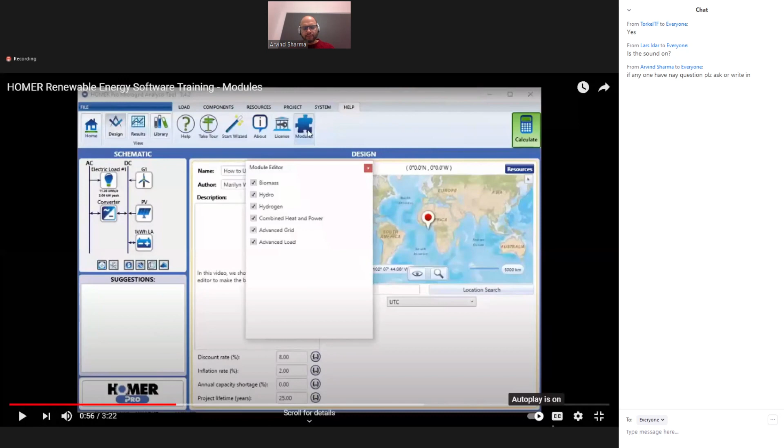I'm sorry to disturb you, Arvind. Before just going to the software, can you kindly please give some overview introduction about this Homer software? What type of analysis - overall, I'm asking what type of analysis can be performed using this Homer software.

Okay, Konada, I was playing this video - if voice is not available, can you hear it? This voice was available - were you able to listen to the voice of the software while this video was playing? No, there is some problem, maybe because my voice is on. Now it was available. No. Okay, don't know.

I thought this is something that you have covered yesterday, that you have shown how to download the software, but what are the features of this software. So anyway, I'm just explaining the few features of this software.

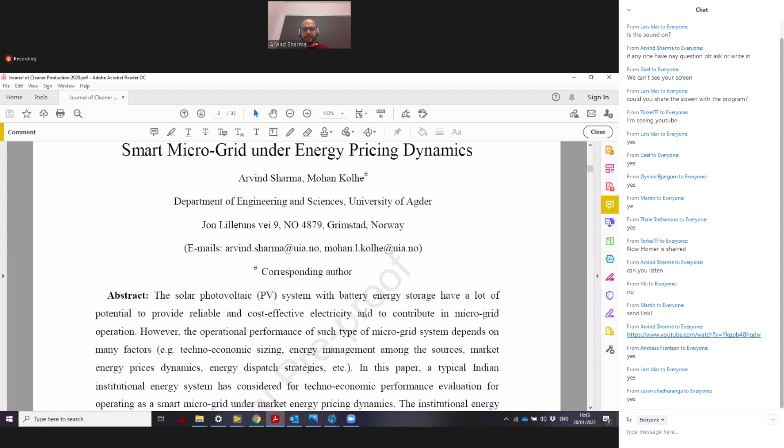Excuse me, Arvind. Yes. Actually, we shared our SETA journal. Okay, no problem. Can you put this cleaner production one also? Yeah, sure, I will do it. No problem. Please, after this one, discuss the SETA journal a little bit as well. Okay, Arvind? Yeah. Okay. Thank you.

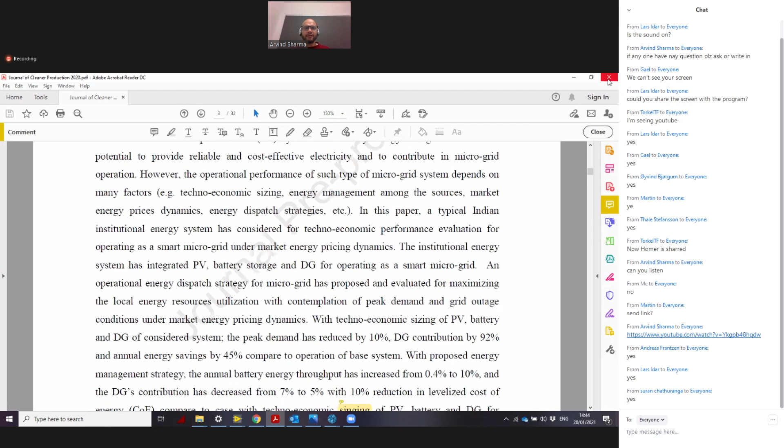Actually, both articles are almost the same analysis-wise. This one is more about the tariff. I can also, but the thing is that in this I want to show you the same kind of data I have taken, but yeah, no problem.

So I will just give you an example. This is the developed model. Can you see my screen? Right now I have the essential load, non-essential load here, DG. Can you see this on my screen? I think no. I will close this.

So here I will show you one screen, and this is HOMER Pro. This is the developed program. Can you see this program? Can you see the DG here? Essential load, non-essential load, grid. I want to show this screen to all of you.

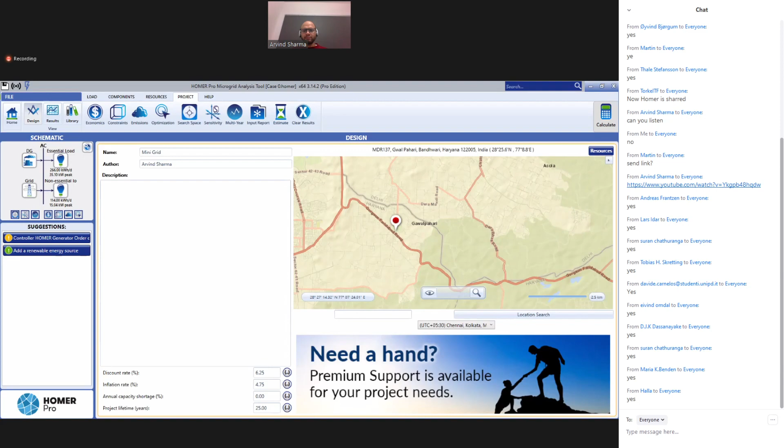So you can see this screen. Welcome to Homer. When you open a new program in Homer, you will see this window. I have already explained to you about the setup assistant, the take a tour, and the continue to Homer for the program. But now we will make a program in Homer.

So now, as I mentioned, in order to develop a program, first we need to mention the name of the project. Suppose this is mini grid. Here microgrid, like India. And I need to first fix this location here. Where is the location? We can search here also, and if we put it here, it will identify this location.

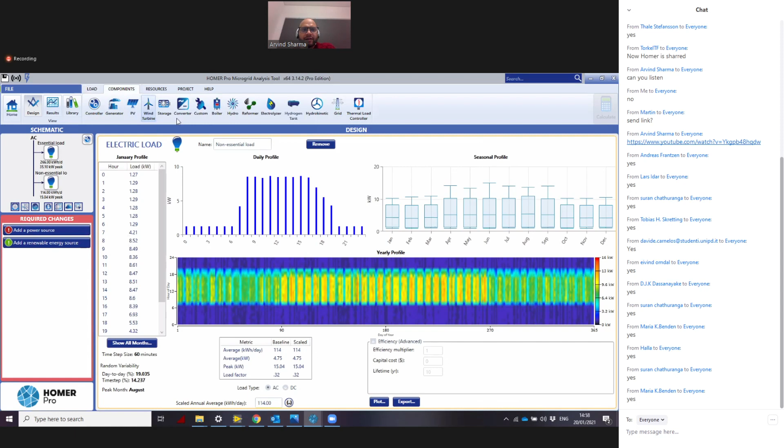Okay, so now you can see HOMER is asking us to add a power source here. So it means we need some power source. As I mentioned initially, we have considered a system where we have the grid and DG. DG is used to meet the load demand when the grid is not available. So I need to first fix a grid here. In the component, I will add grid here.

So the grid is connected, but in the grid we need to fix the price. What is the grid price? So I have taken here 8.35. I will fix the price here, but I have taken 8.5 and 4.5. So here you can see the grid electricity price: the buying price is 8.5 and the selling price is 4.5. This is something that I have taken.

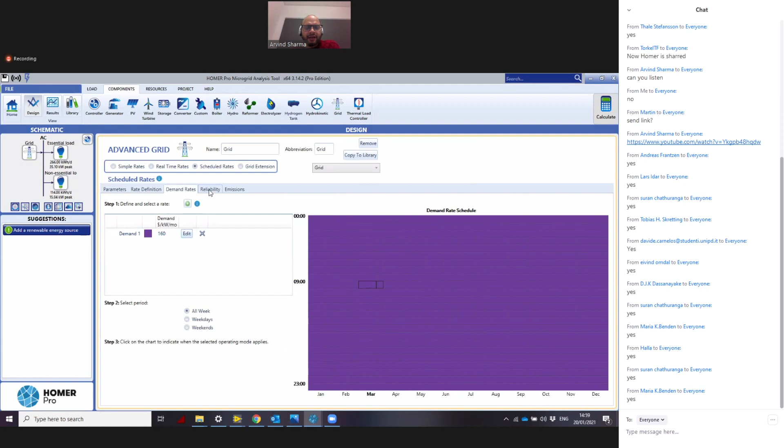Okay, then move. Then here also fix some demand rates. The demand rate is 160, and then go to the reliability parameter. As I mentioned, in the case of India the grid is not reliable, so I have considered 2 hours of random grid outage. The software automatically defines this grid outage scenario.

And if I move here, I have taken 365 days, 2 hours of grid outage. Repairing time: if you put a repairing time, it will add 2 hours plus whatever I put here, like 4 hours. But I am not putting any value here; I'm not considering repairing time. I'm just saying 2 hours of grid outage will happen every day, randomly distributed throughout the year.

So accordingly, when I put these 2 hours, you can see this window here. These black spots show the grid outage points throughout the year. On the X scale, this is the number of days, 1 to 365, and on the Y scale, this is 0 to 24 hours. So our grid outage is happening every day.

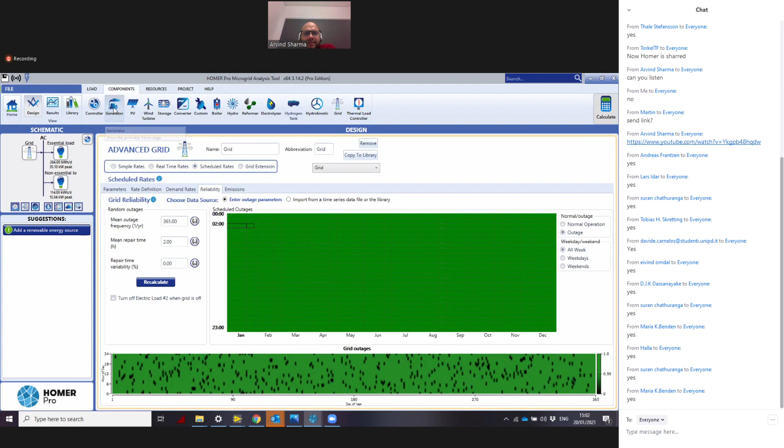So now I think we have connected everything, but as I mentioned, the grid is not reliable here. So what will happen when the grid is not available? We need some alternative source to meet the electricity demand. For that we have the DG generator. I will show how to take DG. You can see this is a generator. I'm taking a small capacity DG because in this program a small capacity DG is used.

And we can change this parameter according to our demand. In this case, 50 kW of DG, and then its price. All currency is in Indian currency. It mentions dollar, but all the values are in Indian currency, so the results will be in Indian currency as well. It shows US dollar, but we will analyze the results as representing Indian currency.

And this is the value. Fuel: here we have diesel, so I have put this price over here. And what are the other parameters? Load is 50.

The performance of the system also varies based on the minimum load ratio. So minimum load ratio is at what minimum capacity level the DG will operate. So if I'm selecting here 50 kilowatt of DG, then it will always give 25 kilowatt of power. So if you are not going to use that power, it will be lost. Okay.

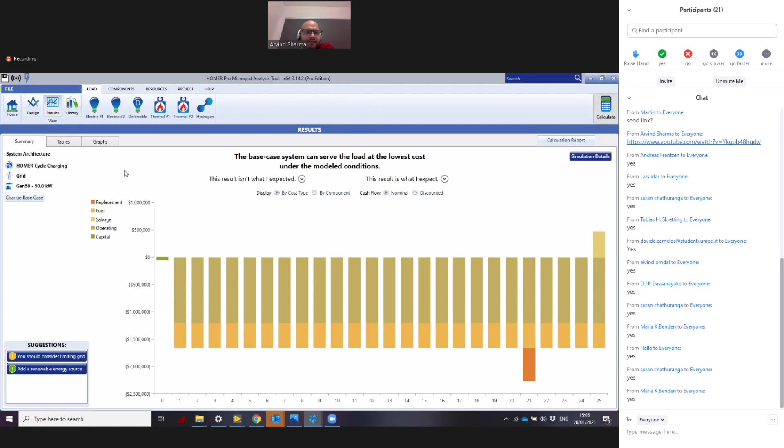So now you can see the software will show us the best possible option based on the lowest NPC, net present cost, and COE, cost of electricity generation. So here the software is saying the solution is available. Our electricity energy cost would be 12 rupees. It is presented as dollars, but here in Indian currency it is rupees.

Okay, so I will just compare this. Yeah, in my previous actual model the cost is almost the same, 12.15. Actually, these results can vary, but what I want to show you is how you can analyze the result here.

So here, this is the generator capacity, 50 kilowatt. Homer is telling us our DG capacity is 50 kilowatt, which we have fixed here. Then we have unlimited grid power available, and it has taken a dispatch strategy, CC, cycle charging, NPC net present cost, COE, and operational cost. Then initial cost is like this. Renewable energy fraction is 0. We don't have any renewable energy here.

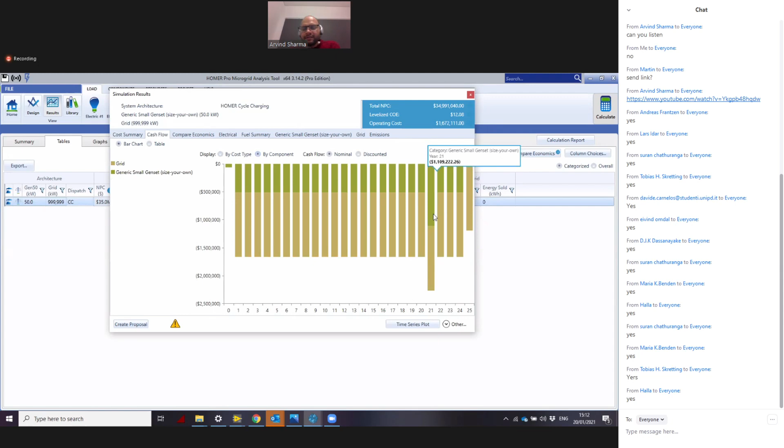Here you can see in this particular 21st year, the cost of this grid DG has increased because we have replaced the DG - maybe after 20 years the DG has been replaced. That's why this cost has increased.

You can also see these results in a tabular form. This is a nominal table, and then we can also see the discounted results. Then we can compare in the header. We can also compare the economics of these different parameters, whatever we have taken.

Then these are the electrical parameters. You can see the electrical parameter here - how much energy is generated per year by the DG and the grid purchase, and the total. We can also see the consumption, AC primary load, deferred load, and total load. But here we have not categorized the load, so it's simply AC primary load.

Then here we can also see the excess energy. As I mentioned, this excess energy exists because the DG sometimes generates more energy than is going to be used, and this energy is almost 5% of the total energy generated in a year - a significant amount. So we need to take care about the system while developing or sizing it, that we should not over-size or under-size the system. We should be very careful of this particular parameter: excess electricity generation.

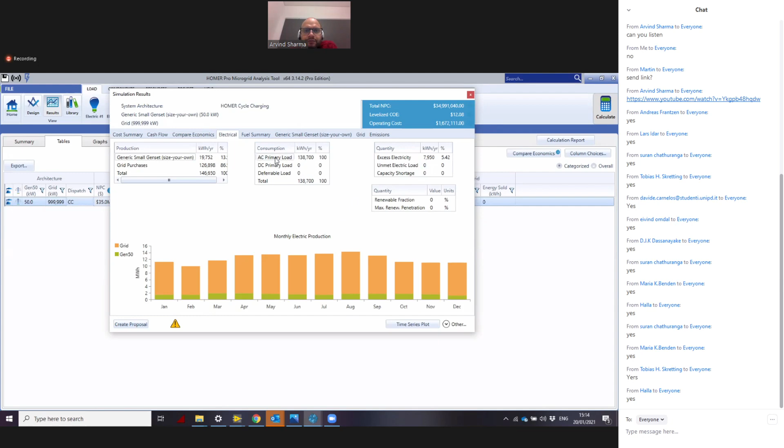Then we'll go to the fuel summary - how our DG is performing throughout the day, throughout the year, in different months. You can see that in the April month, the DG performance is higher compared to the other months of the year, and in September also. This is also something we can analyze.

And next is the small size generator and its performance - how our DG is operating on different days of the year. It is the same graph, but we have created it through this grid outage scenario. So this is something that has been reflected here.

And there are different parameters - hours of operation of DG, number of starts, meaning how many times the DG has started operating to meet the load demand, then capacity factor. If you're not able to understand any parameter details here, you can go to the help section, because there are a lot of parameters and you need to know some definitions.

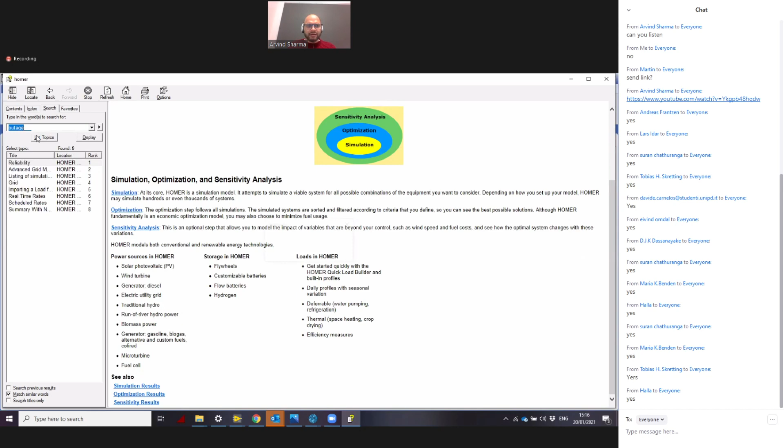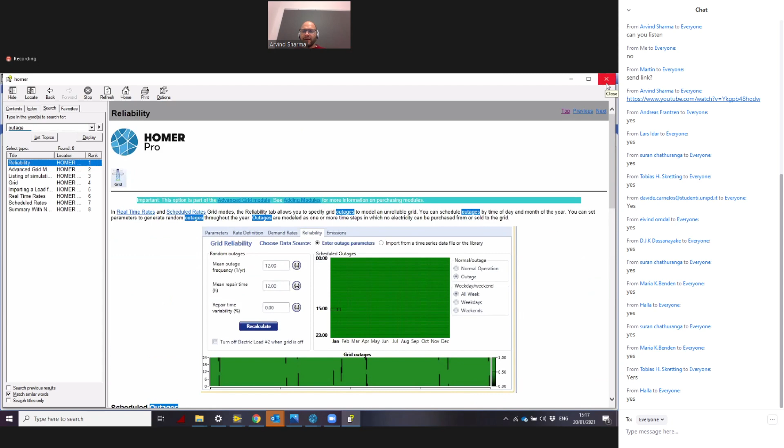So we have a help section here, and if you go to the help, we can just type in what we need - like outage. If you want to see how this reliability works, in this help section you can see the definition of all parameters, and also how we can define this, what I have explained, and the definitions - what are random outages, what algorithm is used behind this, and scheduled outages, what is the meaning of scheduled outage. All these things you can get more details on from the help section. So I'm just giving you the overview of how you can see this.

Then this is also the same thing about the grid performance. In the grid also, we can see how our grid is performing each month of the year - purchase from the grid, and we have not sold any electricity to the grid, so it is zero. These are energy charge, and these are the demand charge. Then we see this graph of grid purchase, and grid sold at zero. So once we connect any PV, maybe there will be some value here.

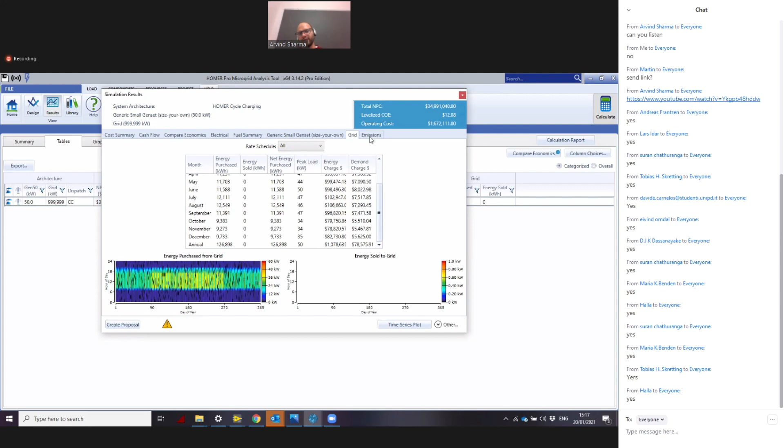And this is about the emission - what emission we are going to save from this.

So, is it clear to everyone how we have done this analysis? If you understand up to this, I will move a little bit further. Now I will show this time series plot, how it works.

If I want to analyze the system performance based on the time series results in graphical form, we can go into the time series section plot and double click here, and this window will open. Can you see this graphical window? There's some graph here, blue and a little bit orange.

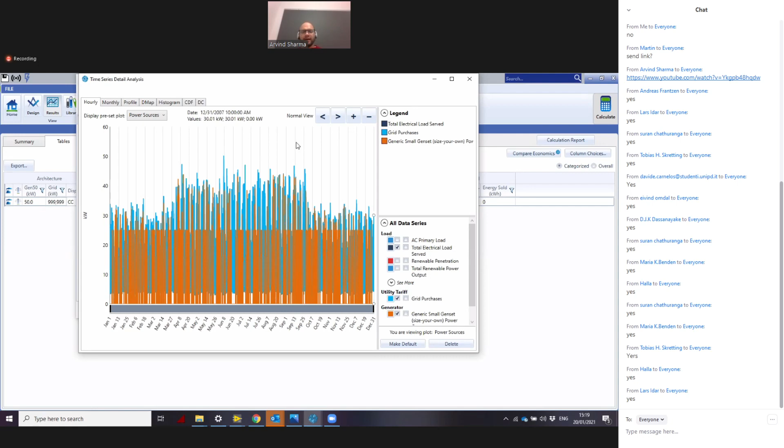It's giving us the plot of electricity demand, electricity load served. Can you see this profile? Okay, good. I will expand it a little bit so that you can see.

Now you see, in this particular time series graph, we can analyze how our system is behaving in terms of the contribution from energy sources and our load demand. Here you can see we have the total electricity load served selected, and we have also selected the grid purchase and the DG, our small genset. So I'm just removing this and this.

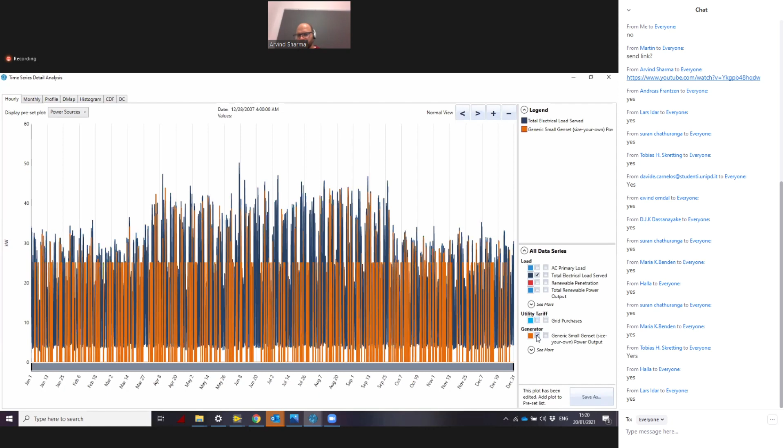So this is our electricity demand, total electrical load. Initially, if you recall, I put two load demands. In this particular graph, the system has added both demands hourly and is representing here the complete load demand.

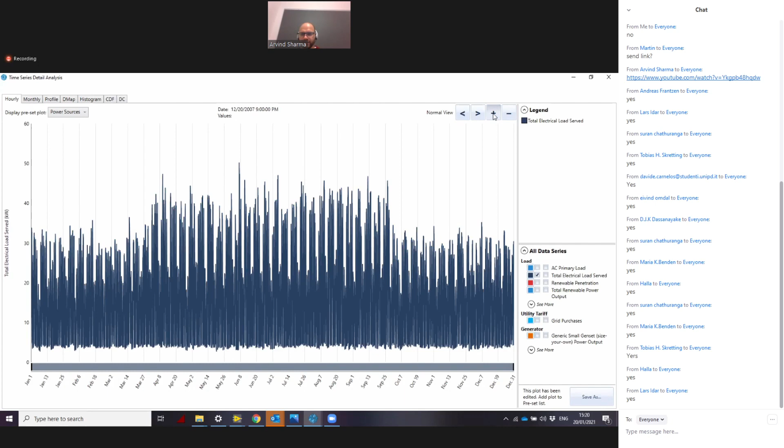Then I want to see these results in terms of the January month. I can expand this, zoom it here, and move it like this. So this is the graph of the January month load profile. I can also see this load profile for a particular day, like this is 7 days, and this is for a day.

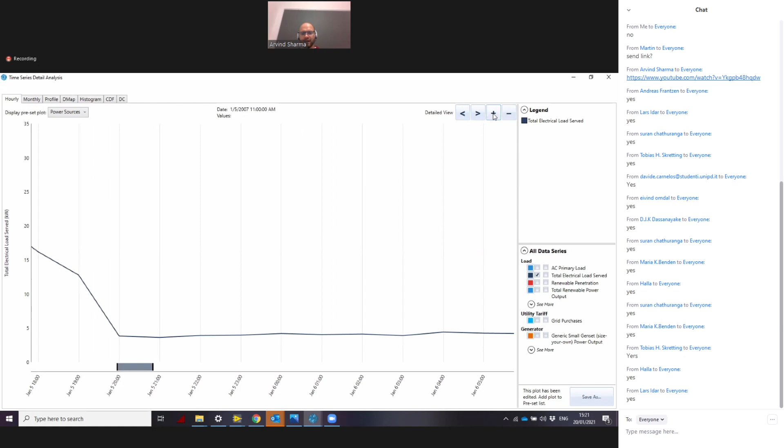If I go here, to 12... so it means we can analyze the performance of the system on an hourly basis. Hourly results we can analyze here. Okay, so this is monthly.

If I want to see in the January month how much energy has come from the DG and how much from the grid, I will see the grid purchase, the amount of energy taken from the grid, and I can change its color, maybe red for grid. So I can see here.

Now I can choose a different scale for the grid, like this. If I select this, so this is our grid, and this is our load. But sometimes you see grid is zero. When grid is zero, how will we meet the load demand? Load demand will be met by the DG.

So DG, I am making it black and in a second form, and you see this is our DG, how our DG is operating here. Whenever this grid outage is happening, our DG is going to operate.

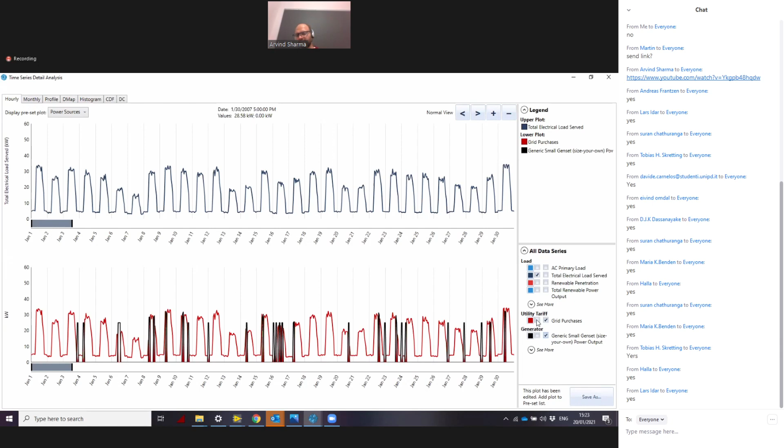I can see it more closely if I take these parameters in the same scale here and expand it like this. We can expand also like this. Just click here, and like this, click here and hold it for another pointer, and we'll expand it. You can expand it.

You see, load, I will make it so. Now, can you see in this graph? At this 10th January, 9 o'clock, we have some load demand here. This load demand was being met by the grid. Grid is represented by the red color, and DG is represented by the black color.

But what happens suddenly is this grid outage happened. Immediately DG starts operating here. So you see, grid is getting down, and our DG is taking care of the load. For this particular time, our DG has met the load demand. This is something we can analyze very closely.

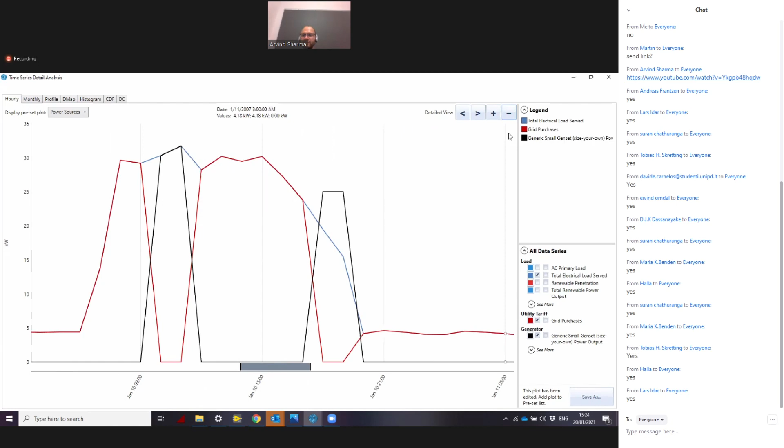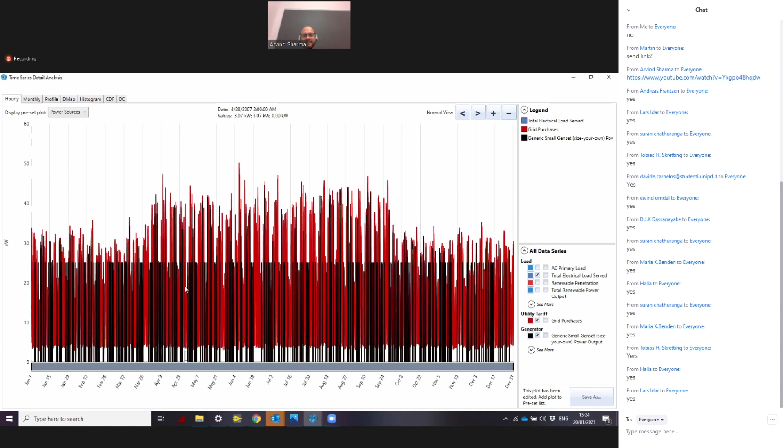So if I see how it performed throughout the year, we can see like this. I have zoomed out, so you see this is a complete year profile. The black is our DG, red is our grid, and blue is our load. But you can see we are not able to see the load because it has been covered by this grid.

So what we can do is take this load in a different scale, like here. Now DG and grid are in the first axis, upper side - red is grid and black is DG - and the lower one is our load. If we expand this, we can see the results.

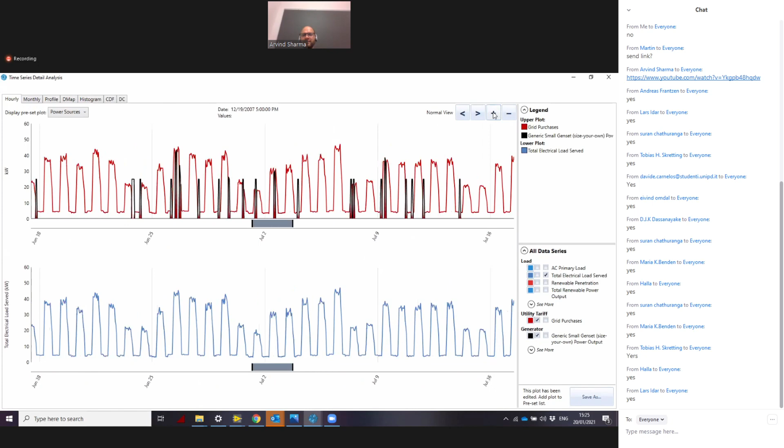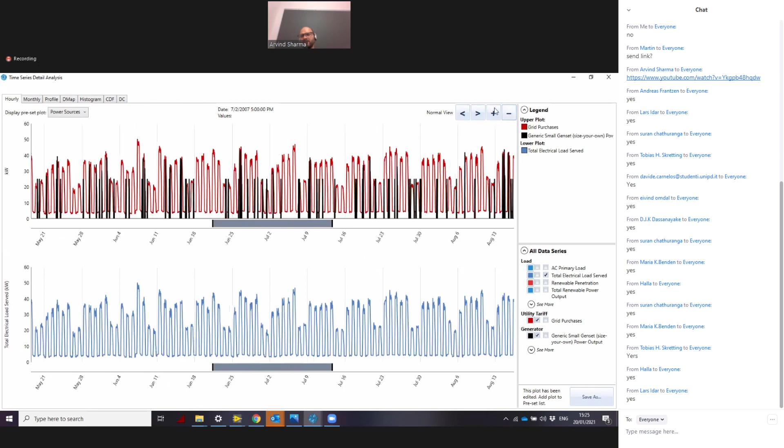Do you have any question up to this? This is the basic concept of the software, how it works.

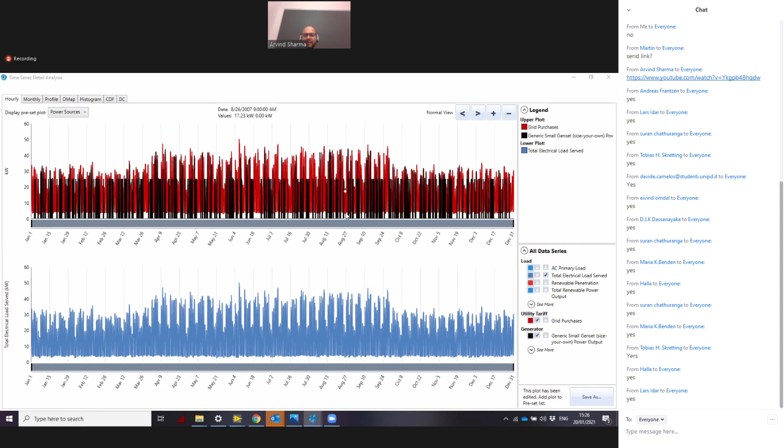But now the next question is how you can save these results. And if you want to generate your own results, make your own graphs, is it possible? Yes, it is possible. You can take this data, save it hourly, for whatever parameters you have selected. All data you can select and save, and then generate your own graph, whatever graph you want.

So here we can see other parameters also, like DG and DG capacity. Our grid prices are the same, not going to vary. We don't have renewable penetration here.

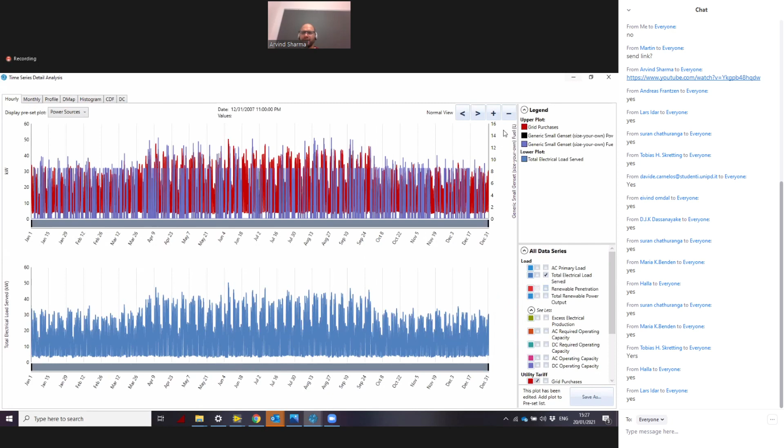So now the next thing is how we can save this plot. I am closing this time series window, but I am saving it. I want to show you how we can save this graph. We can export the complete report, whatever we have discussed so far, like this.

There is an option on the left hand side, create proposal. So if I click here and say create proposal, I say like XYZ my group. Okay.

We can create a project report. The system will create a report for us. It will take a few seconds.

I'm sorry, I have not taken any break. Usually after 45 minutes we need some break. I forgot that, but I think I will finish it soon.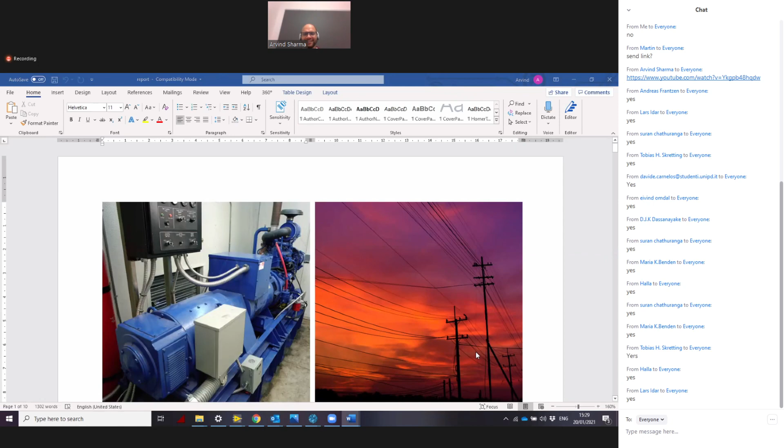I think I will first share the screen. Yeah. So Homer has generated this report for us. So we can see this report in the Word format. Whatever format we can choose, it will give us the report in that form.

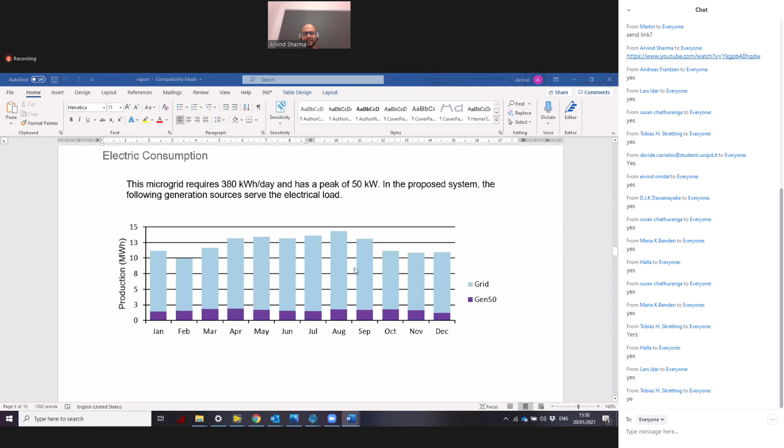You see, so here like the profile, electricity load profile, and the DG and the grid, how it is going to vary throughout the year. All parameters we have discussed, we can get this report from that icon, and then we can analyze the results.

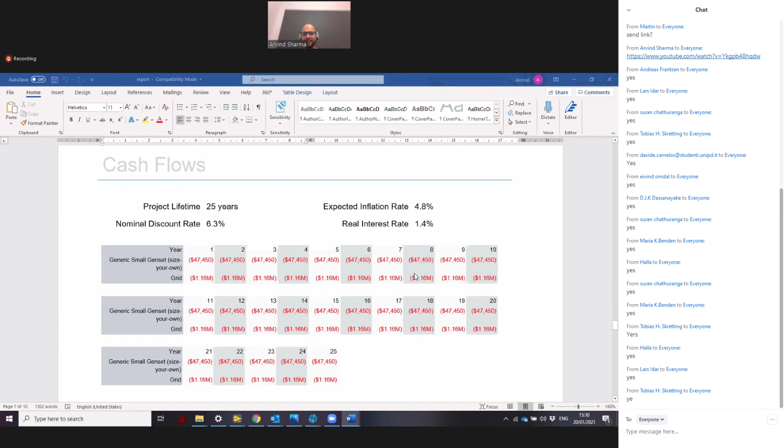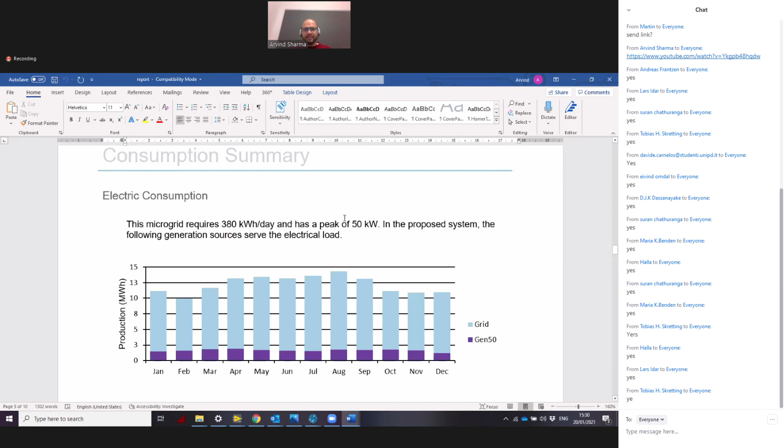You see here, but here we only have load, grid, and DG, so it is not a very big report. But if you have PV and battery, then you can analyze more. So this is the basic of the report generation. We can analyze different years.

So now, up to this, if you have any question or clarification, we can discuss. Maybe then, as Konara mentioned, I can discuss some more and give you an overview of the paper that he has shared with you.

Arvind, shall we first have a break for 10 or 15 minutes? And then we will have a discussion with the students if they have problems related to what you have discussed so far. And after the discussion, we will come to the SETA paper, because in the SETA paper I think we have used a photovoltaic plant as well.

Yes, because, but I think if they want me to develop this complete model like what I developed for the SETA paper, I would suggest they first try the features of the software themselves, and then if they feel any difficulty, I can help them develop this model. Maybe they can contact me, and I can help them developing this model.

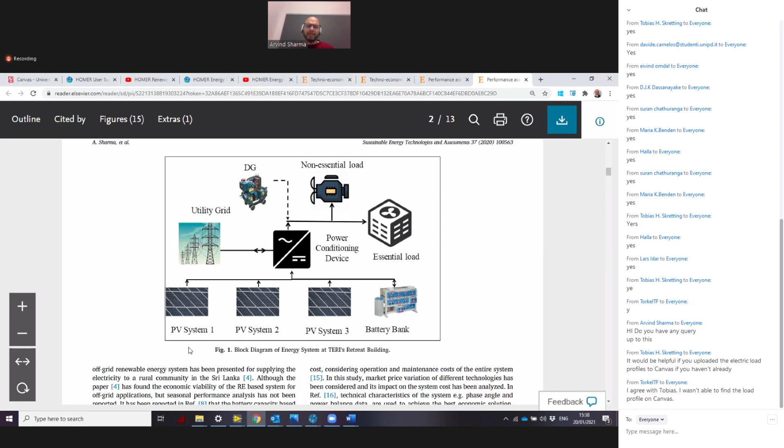But in my paper, I have taken the PV capacity fixed at 50 kilowatt, because we have the rooftop area available where we can install up to 50 kilowatt. So that is being considered. In this particular paper, the capacity is different, so you don't need to worry about that. The PV capacity is different because the load data is also different, but the main concept is the same.

First, we have designed a system without battery energy storage, and we are trying to find the solution where we can meet the load demand when the grid is not available. In the initial case, DG is meeting the load demand when the grid is not available. But when we add the battery, the battery will reduce the grid contribution, the battery will participate, and solar energy will also be used to enhance the overall performance of the system and reduce the grid contribution to the load.

So in this paper, this profile I have already shown, essential and non-essential load, and here you can see how our battery is performing. In this analysis I have taken this battery performance graph once we include a battery in the system. We can see the battery charging status and how the status of the battery varies throughout the period. The minimum state of charge is considered 40%, and the battery charge varies from 100% to 40%.

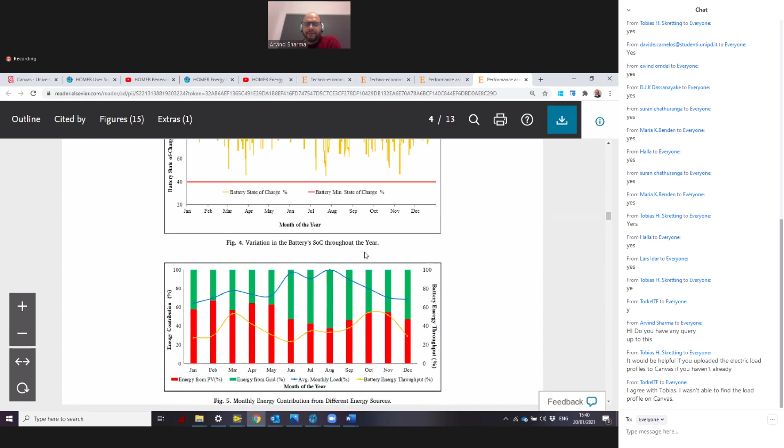Now in the next graph I have tried to show how the contributions from PV, grid, and battery energy throughput vary in the different months of the year for meeting the load demand. Green represents the power from the grid, red represents the PV, blue is the average load throughout the different months of the year, and yellow is the battery energy throughput. We can see PV is generating more power in April, May, and also October, November.

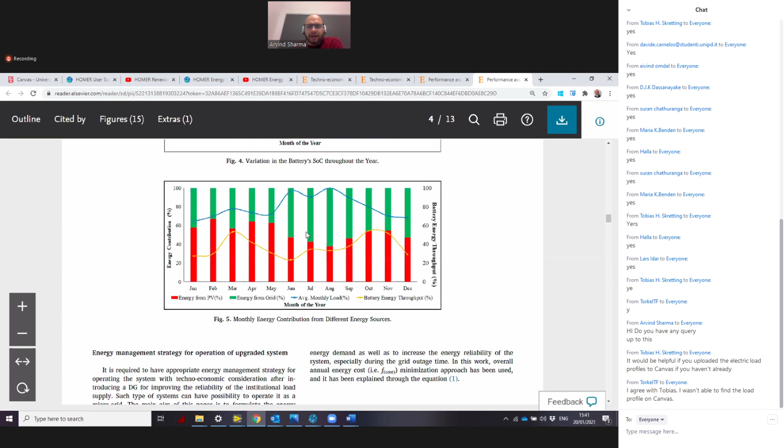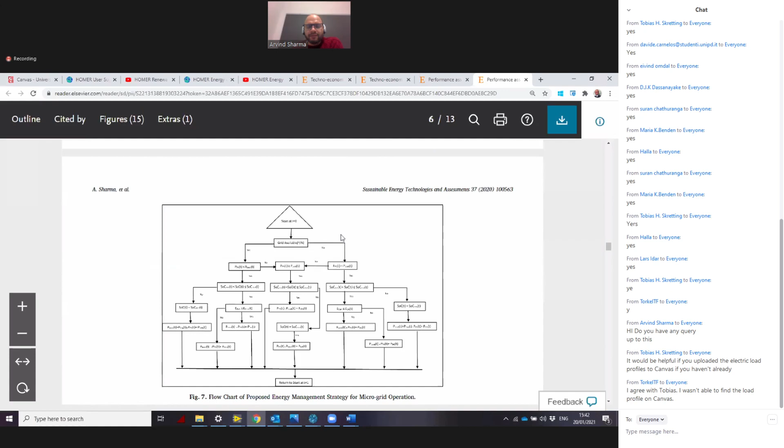So what we have concluded out of this: after sizing of the system, we have used this management strategy to enhance the overall performance of the system, and this is the energy management strategy which has been used here. This strategy will take time to explain how it works, but I would suggest you can just go through the energy strategy. The main objective of this energy strategy is to increase the PV contribution and reduce the contribution from the grid and the DG, and also to enhance the system performance in terms of reducing the overall economic cost, energy cost of the system.

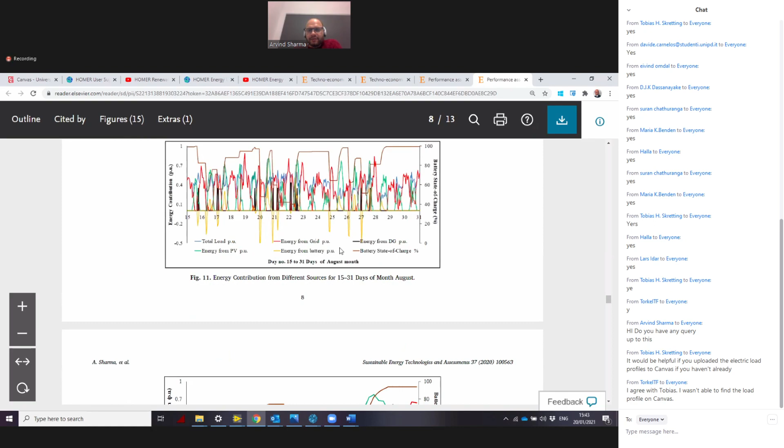So here, this is the energy contribution of different sources from February month and then August month. So 2 months have been selected. February is the worst month, and August is the best month in terms of PV production. So 2 months analysis has been done, and then again the battery performance. You see the August month results, and then how our battery is performing. Then battery results are also analyzed.

You see, initially when we don't have any energy management strategy, how our system was behaving, and then later on in the upgraded system when we applied this energy management strategy, how our battery is going to perform. So you can see clearly the role of the energy management strategy to improve the battery performance.

Yeah, the load profile, yes, there is some query from the students. So I will send this load profile to Konara. Maybe Konara will add this load profile to the canvas, and then you can develop the system. Okay, so there is no problem on that. Yes, I agree. We have not provided the load profile as of now.

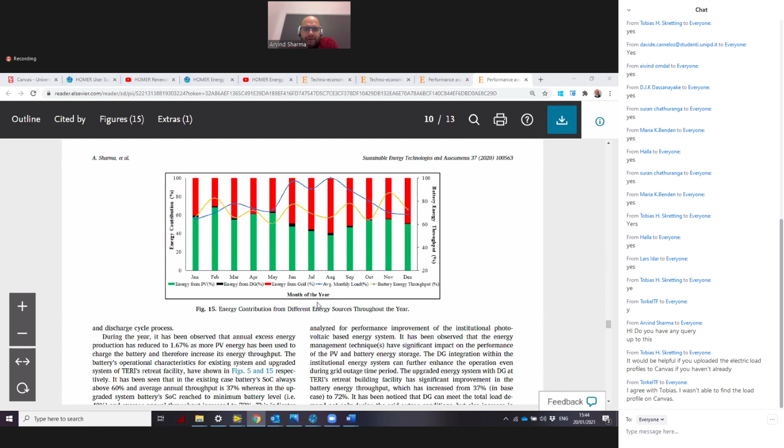So now again, how we are going to analyze these results. This is again month-wise contribution from PV, grid, and DG. Here you can see the black one is DG, the red is grid, and this green, in this graph, is PV. So I have given the overall overview of this paper. You can analyze the contribution from different energy sources and see how the performance of the grid is going to improve.

Okay, so I will just stop here. I think I have given you a brief overview of the system of Homer software, and you can start developing some program based on the load profile that we will provide, and consider different scenarios based on this paper which is available in the canvas. And then if you feel any difficulty, you can contact me. Okay, then maybe we can discuss further on this.

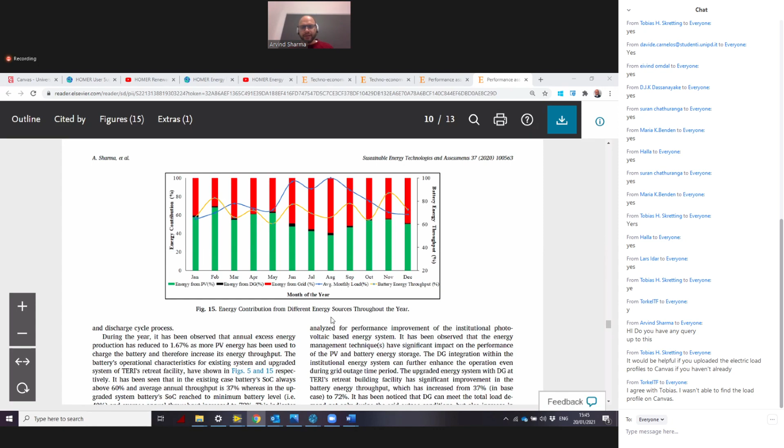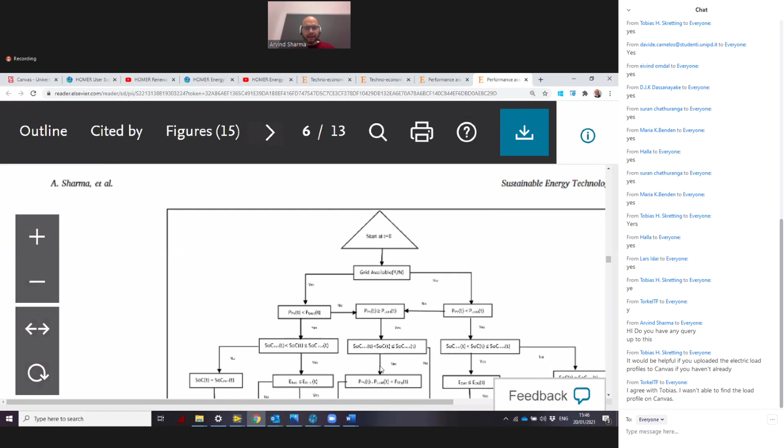Excuse me, Arvind. Yes. Arvind, can you just explain, not in much detail, how to configure the energy management strategy that you have shown using your flow chart? Yeah, that's why I thought I would explain later on, because it will take some more time. I would prefer if they can first go through that. Yes, I will explain. I will not take much time, but still I say that if they can first go through this, otherwise they will not be able to understand it. But I will explain how the energy management strategy is working here.

In this block diagram, I think you are able to see the block diagram here. No, I mean, just to show how to build this type of block diagram in Homer. So no, in Homer we cannot build it directly, but once we work on Homer and we see how the system is taking our preference, based on the preference we have selected, we can create this management strategy. Did you understand? In Homer we can define the preference for the battery, preference for the grid, preference for our load when we have to give the priority to the load. But this is the overall picture of what is happening within the system in Homer that I am going to show in graphical form, in illustration form, how this battery is selecting what preference we have given.

So if I see here, first we are asking Homer to check the PV. So at the initial stage, Homer is first giving priority to the PV. If PV is available, we can give more and more energy from the PV to meet the load demand. This is something that I have shown in the Homer software. Initially, we can choose an option for how our PV energy should be used. Shall it be fed into the grid? Or shall it be used within to meet the load demand?